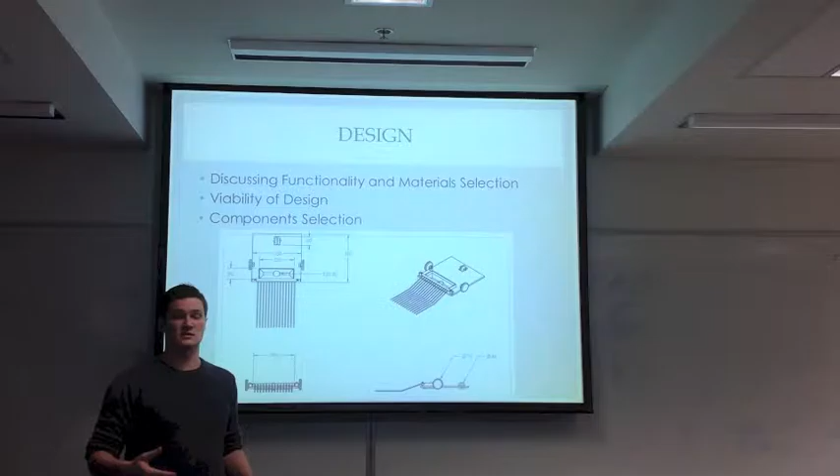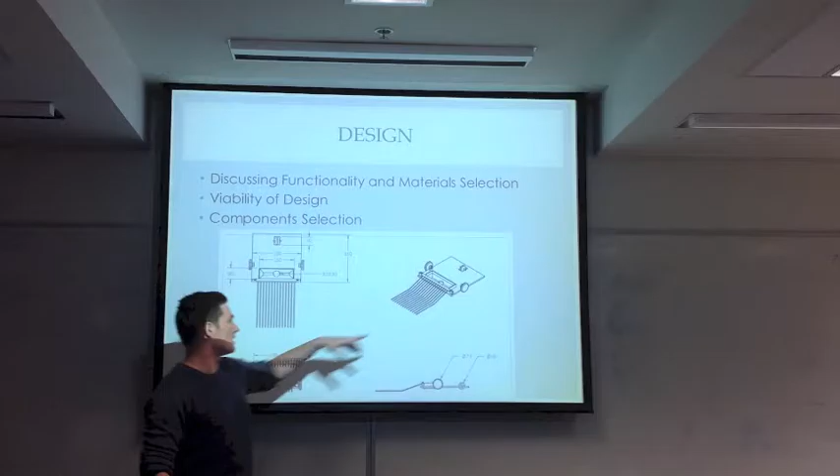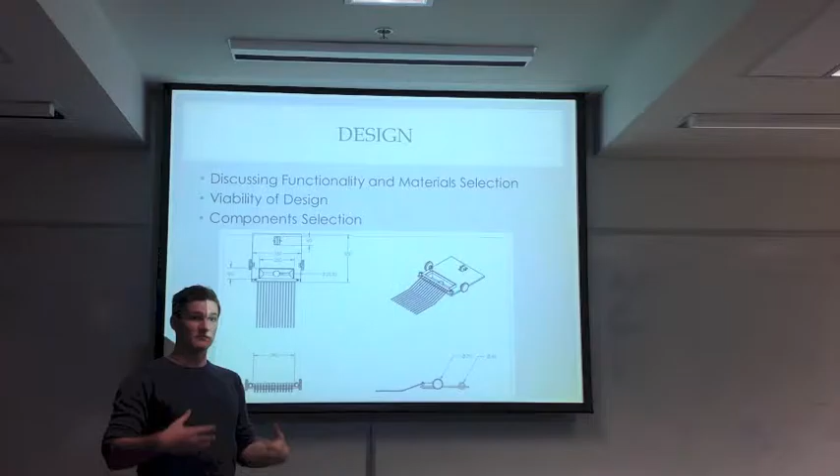For our concept phase, we all had differing and multiple ideas. Mutual agreements on certain ways we wanted the concept to progress allowed us to progress forward. Matrix analysis allowed us to list out all our different options. And the concept we went with, the forks coming down and driving around as opposed to the arm model, gave us higher level accuracy, we thought, and more flexibility in design and component selection.

Taking our design from the concept stage into realising the design, into the design stage, we used CAD software, SolidWorks, to start finding out dimensions and how it's all going to fit together. Things like we figured out in the design stage were the angles of what the forks were going to look like, maybe some distances, how big the final square, and where the wheels were going to fit. And from here we started finding a more detailed design.

In the production phase of the design process, we discovered design flaws which were overlooked or not considered during the designing of the vehicle. To incorporate things like that, we raised the servos to improve the effectiveness of the pickup function, as when designed they were too low. We also considered a variety of materials, and through producing and fabricating the vehicle we decided which was practical and which was not, which was overlooked during the designing.

The next stage in our design process was the testing stage. We've chosen open loop programming, and with that comes more responsibility towards making sure that our design works. So the first problem we faced was getting the vehicle to drive in a straight line where the two wheels are driving at the same speed.

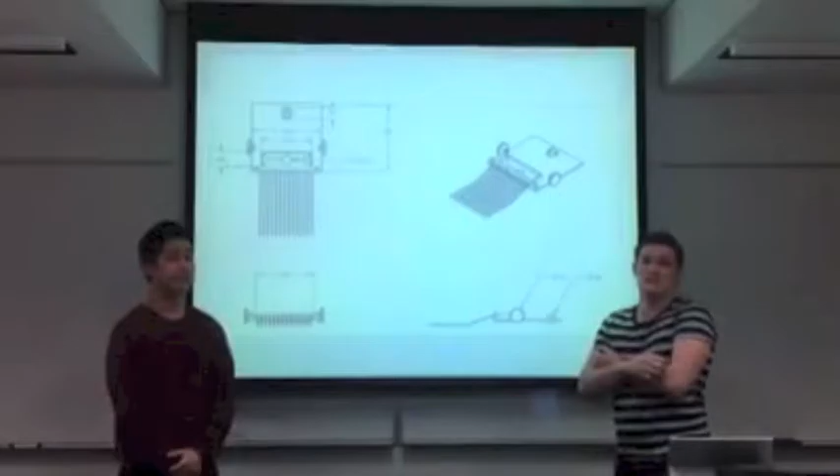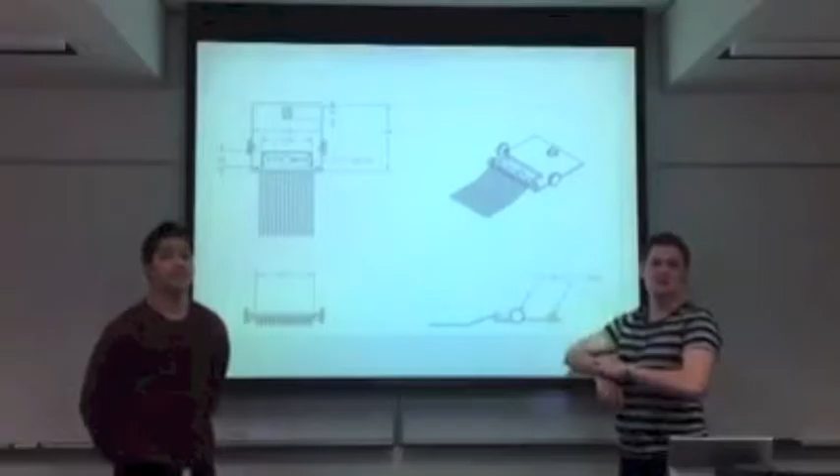For the Warman 2015 project, we were required to design a system that fits in a 400mm cube envelope that starts with a single push button, a single action, and is less than 6 kilograms in mass. Also, the runtime should be less than 120 seconds, and the system should not overhang the edges. Also, it should be in contact with the floor at all times. So our system is required to drive, start, drive, pick up balls, control the balls, and deposit the balls in the holes.

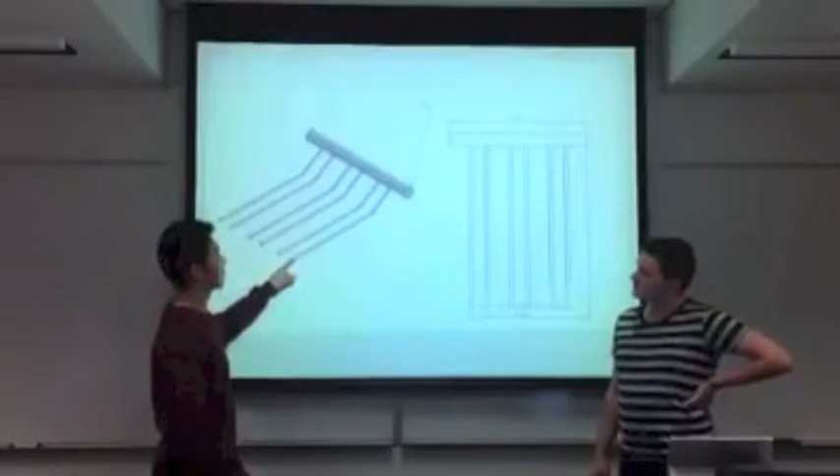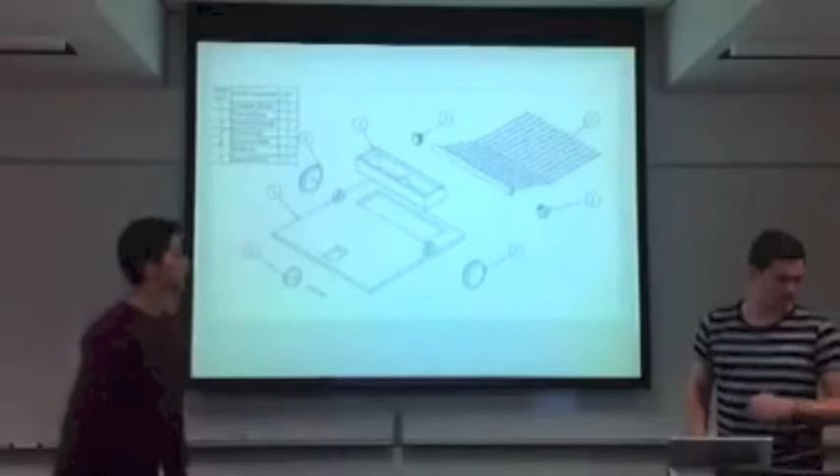So throughout the design and production process, we made many alterations and modifications to the design and to the actual vehicle. This was the initial CAD design that we formulated. Most of the measurements that we made stayed fairly similar, or the same, and spacings and the components all stayed fairly similar.

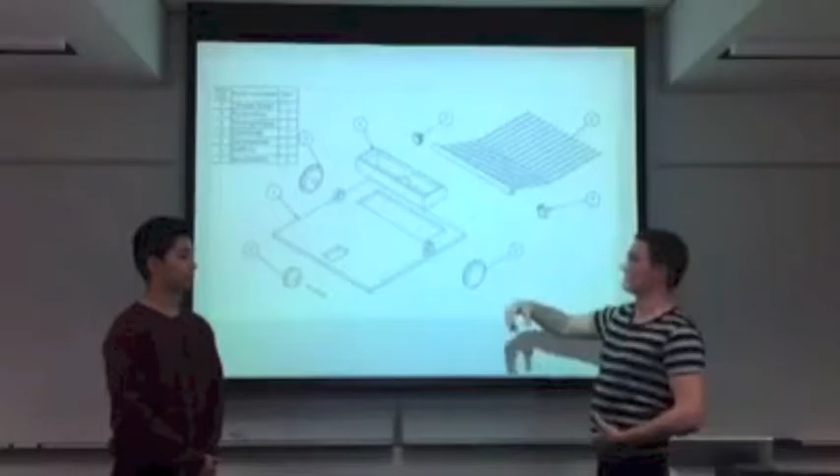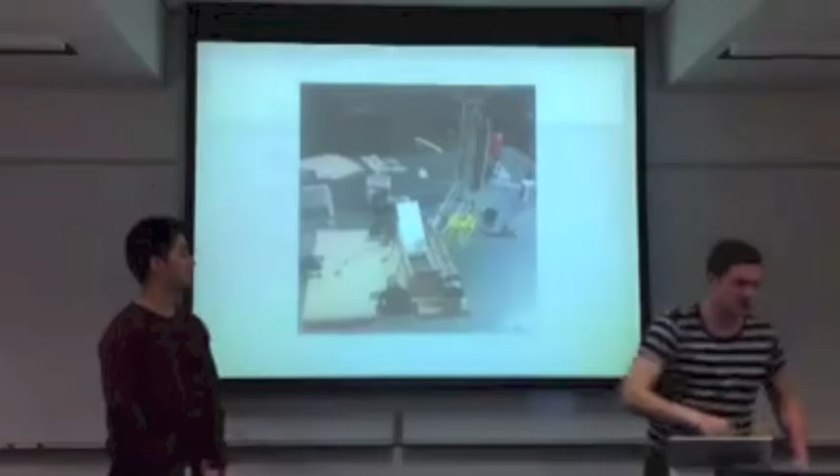Some things that did change. A big major element was the pickup forks. The main changes on the fork were that we changed it to 4. We've added a second set of aluminium coat hanger just for that extra strength. We measured out the tracks and we aligned each arm to fit into the T.

Alright, here's the exploded view of the model, where we can better see some of the components.

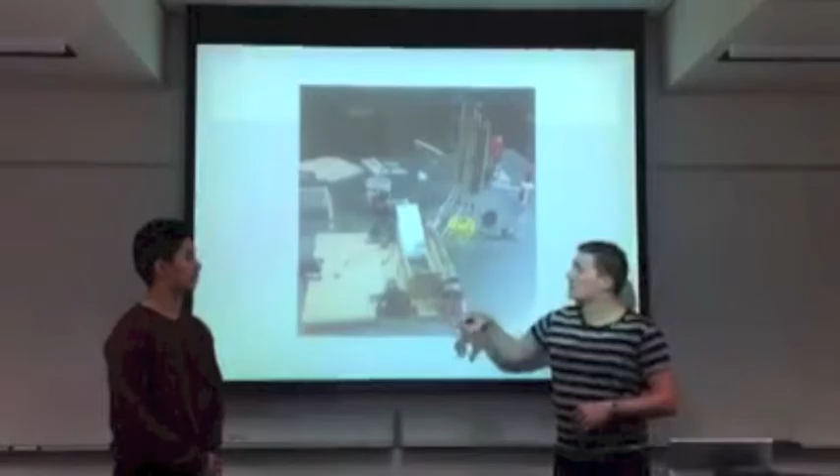We had micro servos initially installed, but we had to change them out, as we'll see how we do that later. Some things like this we didn't go into detail on how we were fixing the motors, but we sorted that out. This is how the design was coming along midway through the production process.

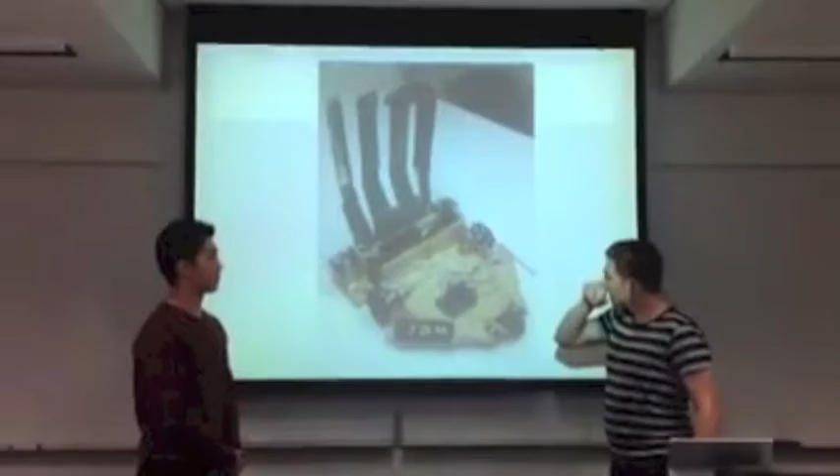We can see how the high torque motors were installed here. The wheels we had to push into the chassis, so we had enough room and didn't go over the edge. This is how we installed the DC motors with bent steel brackets, just straight bolted down onto the chassis. We added aluminium plates onto the middle of the arms just for rigidity.

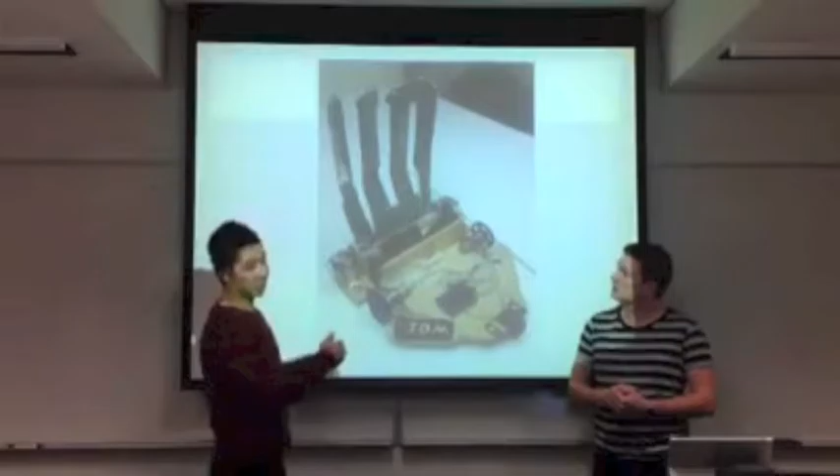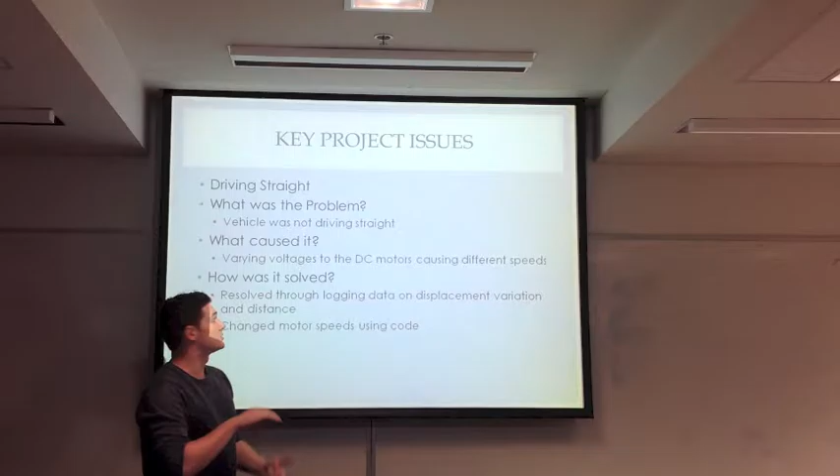One of the changes that we made, this was the final design. We had to cut corners off the back of the chassis so it wouldn't go over the edge of the track.

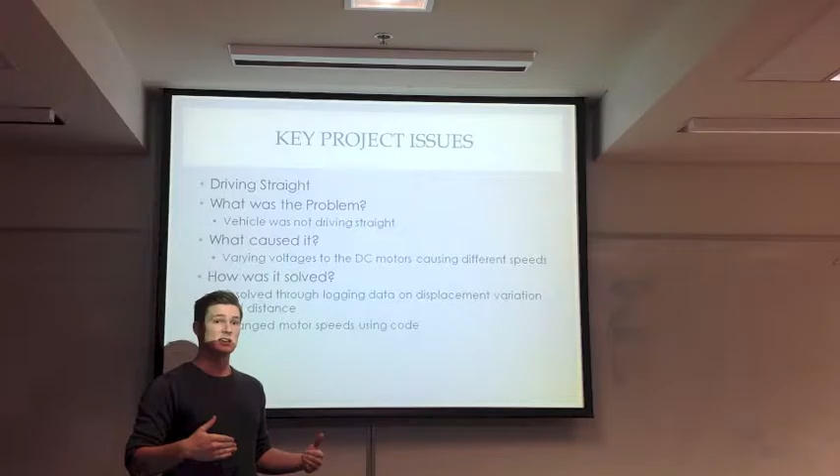We added a second set of aluminium, and we also added them on the sides just for directing the golf balls. We added tape into the middle because they were falling off and going to the next arm. We angled the tips to allow tolerances against the wall.

One of the main issues we had with our vehicle was it not driving straight. What caused this? The two DC motors were going at different speeds, possibly due to varying voltages and inconsistency in the motors. So how did we aim at solving that?

We tried to solve that with voltage regulators. We actually tried to log all the data of the different speeds to gauge how consistent they were and whether they were going left and right. We tried to use this to get the best speeds for each motor, to make it go straight on a most consistent basis.

Another key project issue which we encountered was fork rigidity and weight. What was the problem? The prongs were too flexible, and that provided difficulty when picking up the balls. Also, the prongs were too heavy for the original design, and the servos were struggling to do the movement necessary to pick up the balls.

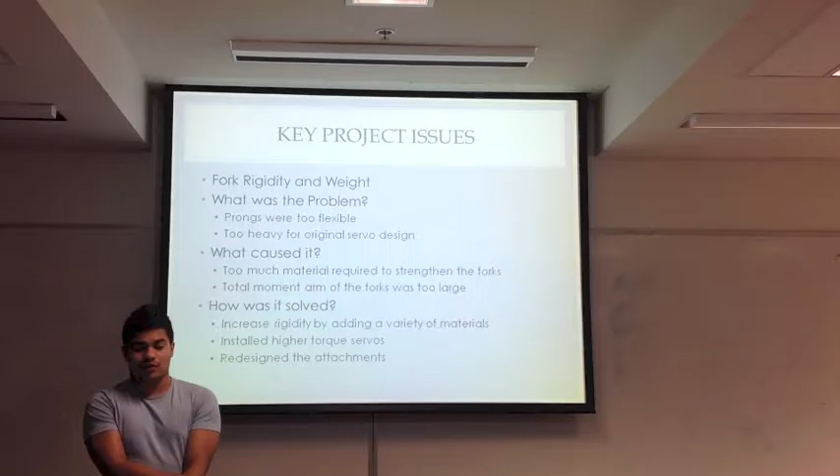What caused it? Mainly there was too much material on the prongs. This was too heavy for the servos, causing it to be unable to pick up the balls. Also, the attachments which we placed on top of the prong were far too far away from the center of the fork, and that caused the torque to be far too large for the prong.

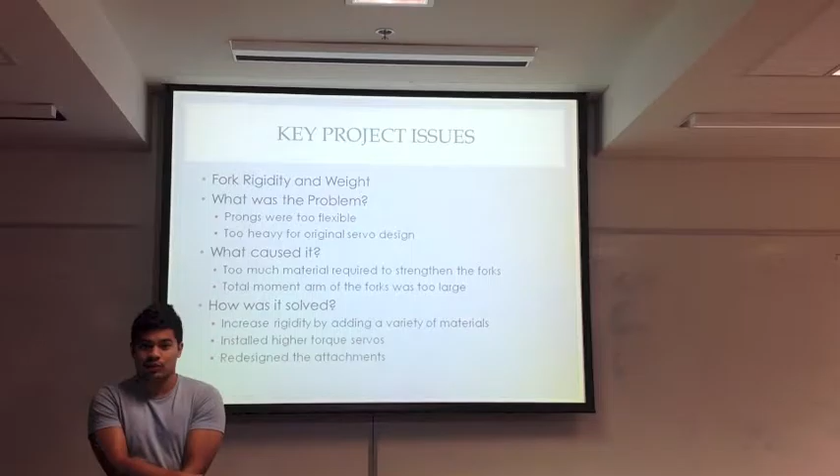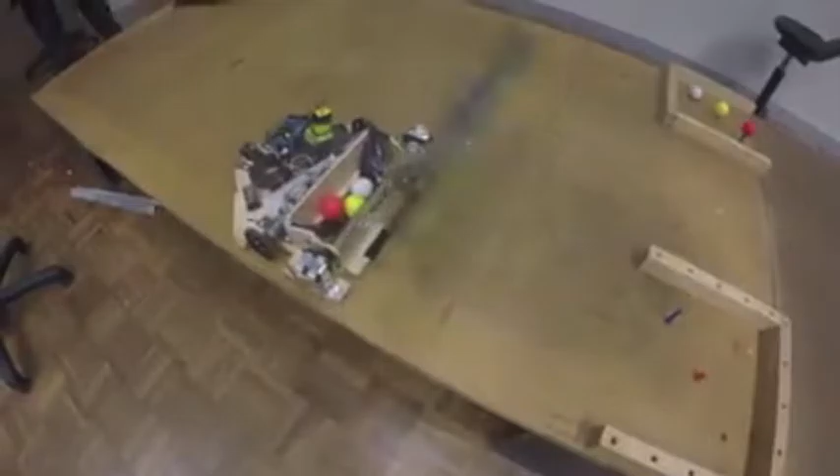We solved this by increasing the rigidity of the prongs. We did this through adding a variety of materials such as aluminium sheets and also duct tape to increase the strength of the prongs. Also, to increase the strength of the servos, we put new servos in.

These are high torque servos instead of micro servos, which increased the power of the fork. Also, by taking off the attachments and putting them closer to the center of the fork, we were able to decrease the torque and moment required to lift up the prongs and balls.